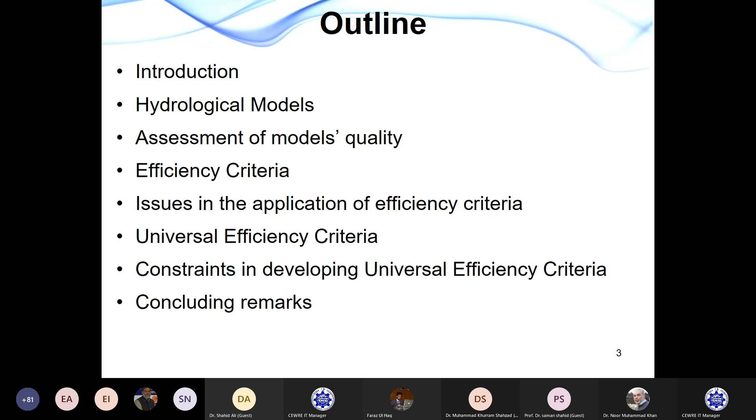The hydrologists and water resource engineers are technically interested in providing information to the decision makers, and in that case, they have to select the appropriate model. The selection of this model could only be done by some efficiency criteria. But in the scientific community, the main issue is that there isn't any single universal efficiency criterion that could give us information about the selection of the appropriate model. In selecting the wrong efficiency criteria, we end up calling a good model a bad one and vice versa. Therefore, I have selected a few slides to share my thoughts on the importance of efficiency criteria.

So maybe we can move to the previous slide. Okay, thank you.

The hydrologists and water resource engineers are looking at trajectories across space and in time. With models, they do a complex abstraction of a system or part thereof, which enables us to look through the spatial and temporal domain in advance. By doing this, we can reproduce the historical and future behavior of natural phenomena.

So whether it is a mathematical model or a physical model or a logical representation of a system, the aim of modeling in water resources is to get information about the parameters of interest, such as precipitation, discharges, water level, storages, before their real occurrence at a certain point in time and space. Or with the help of this model, we can enhance our understanding of the real world, or anticipate the behavior of the prototype in advance, especially in physical modeling in hydraulic engineering.

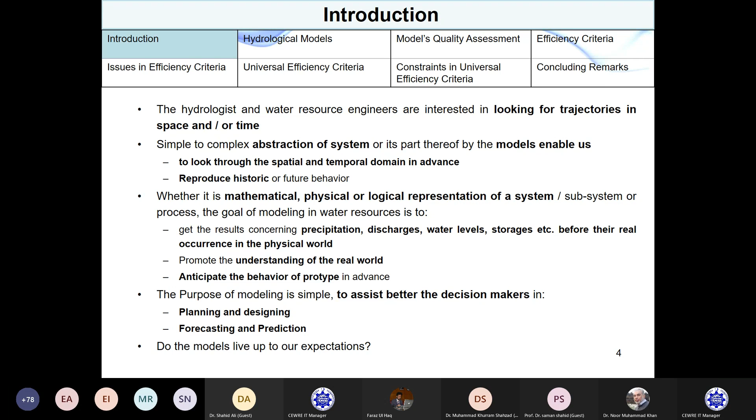So in a nutshell, the purpose of modeling is simple. It is to assist the decision makers in planning and designing, forecasting, and predictions. The question is, do the plethora of models that we use every day live up to our expectations? How can we differentiate good models from bad ones? What makes a certain model a good choice and vice versa? Is the physical representativeness of the model more important than its functional accuracy, or is it justified to attach the same expectations to different sorts of models, that is metric, conceptual, semi-distributed and distributed models?

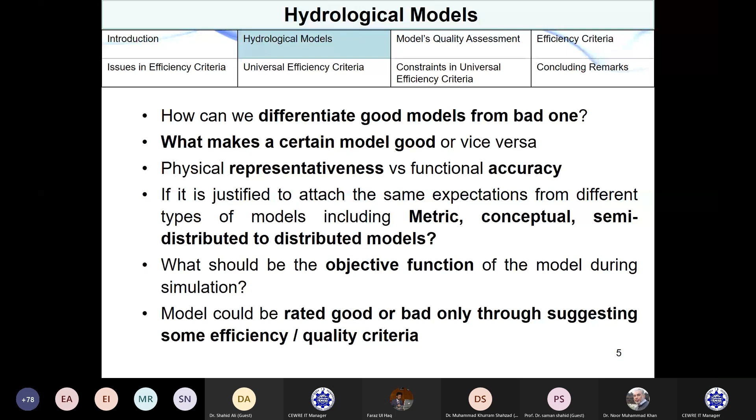So there are a lot of questions. Today I am restricting myself to a very vital question, that is how to define a model. What could be the objective function that makes the model a good choice or vice versa? As we all know, a model could be rated good or bad by scores. It could be the score of a certain efficiency criterion, whether it's Nash-Sutcliffe, coefficient of determination, persistence index, or any other quality criterion that you decide beforehand to use for assessing the quality of the model.

Now, the performance of the model could be gauged through two different manners. One is subjective efficiency criteria and another is the objective efficiency criteria. In the subjective efficiency criteria, what we do, we plot a graph between the observed and simulated values, and then we see how good our model simulated results are fitting with the observed result, and that determines how well our model is behaving.

And on the other hand, in the objective criteria, what we do, we take some kind of objective measures that take the subjectiveness out of the decision making process. Rather, we rely on certain scores. The first indication on the performance of the model is actually the difference between the observed and the simulated values, whether it is precipitation or it is...

Sorry, I'm not seeing my presentation anymore. Hello? Kindly share the slides. Dr. Khurram, yes. We are resharing the slides. Please wait a moment. Yeah, okay.

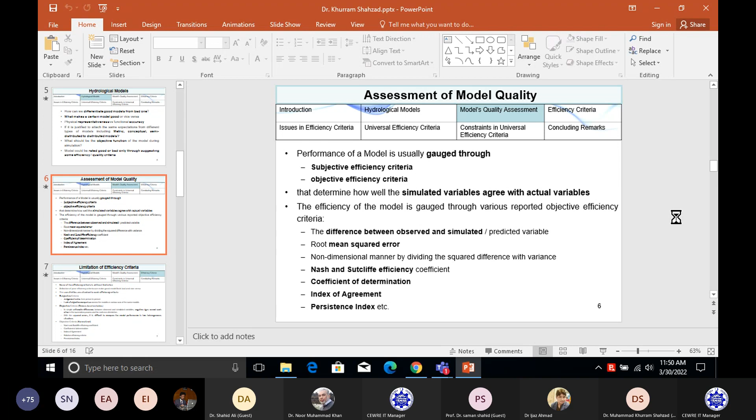Now, as I was saying, the difference between the observed and simulated or predicted variables is the first indication of how good our model is performing. Either we can take the simple difference or we can take the square difference and its root, but that gives us the initial idea about the performance of the models.

And then we have some kind of non-dimensional measures of gauging the performance. In that case, we can use the Nash and Sutcliffe efficiency criteria, persistence index, coefficient of determination, and these criteria have some added benefit over taking the simple difference between the observed and simulated variables. Please move to the next slide, slide 7.

Okay, the point is how we are going to select the efficiency criteria, as none of the efficiency criteria is without limitation, and the selection of poor efficiency criteria makes a good model look bad and vice versa. There are certain sensitivities attached to each efficiency criteria.

For example, if we are taking the subjective criteria in deciding about the goodness of the model, then the judgment about its acceptability varies from one person to another. And secondly, we lack the comparison between one model and another model or two different runs of the same model, because the subjectiveness varies from one person to another.

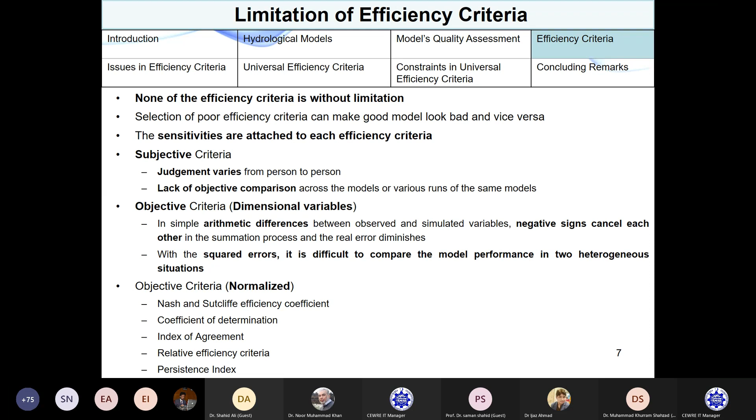Therefore, the scientific community has moved toward normalized objective criteria that include the Nash and Sutcliffe coefficient, coefficient of determination, persistence index, relative efficiency criteria, and certain other efficiency criteria. Next slide, please. But none of these efficiency criteria are without certain limitations and sensitivities attached in certain regions.

I have given you on this slide a depiction of the Nash and Sutcliffe efficiency coefficient. On the top of this slide, I have shown you the equation of what Nash-Sutcliffe does. It takes the difference between the observed and the simulated values and takes the square, and then we sum it and divide it by the difference between the simulated values and the mean, and we subtract it from 1. And then in the range of 0 to 1, we say whether our model is good or bad.

But the problem is, the Nash-Sutcliffe efficiency coefficient could tell you that the model is performing very well, but in actuality, the model is not performing well. I can show you on this graph. If you can see the green curve and the blue curve, these are the two curves showing the observed discharge and the simulated discharge. And the arrow is showing the difference.

The small arrow between the blue and green curve is showing the difference between observed and simulated values. And the larger difference between the simulated curve and the mean of simulated discharges is going to show you what we are going to insert in the denominator.

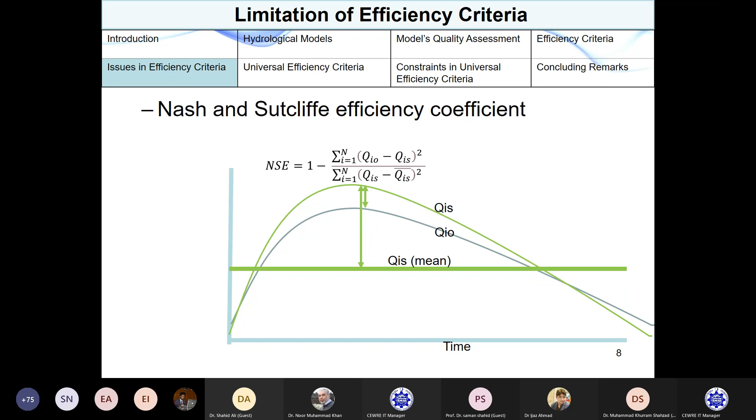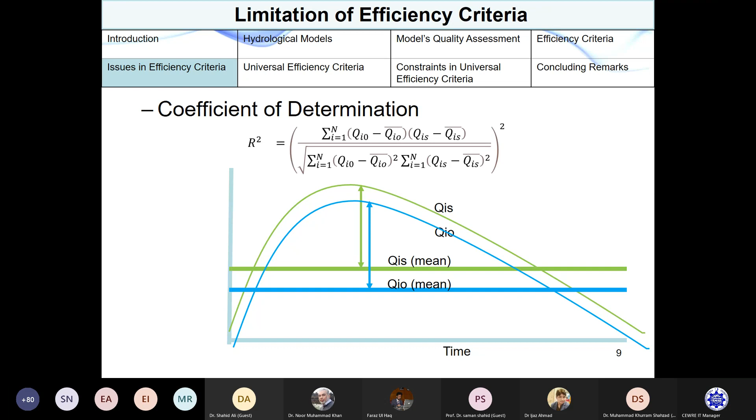The second issue which I want to share with you at this point is that in the selection of efficiency criteria, we need to be very careful about the movement from the known data values. Normally we normalize our difference with the variance. And what is the variance? Variance is the difference of observed values from their mean value. Now, it is a good thing when you're simulating the model for many years and you don't have any information for a year, 2 years, 3 years, 4 years.

Then the best guess you have about the data is the mean value: mean discharges, mean yearly discharges, mean precipitation, and so on. But in the case of flood forecasting, for example, or real-time rainfall forecasting, the best guess we have about the hydrological event is not the yearly mean, but rather the previous data, 1 day before, 2 days before.

Therefore, we need to check the performance of our model not by taking the difference of the observed value from its mean yearly value, but rather by taking the difference between the observed value and the available guess to us, that is the previous day discharge, previous day precipitation, and so on.

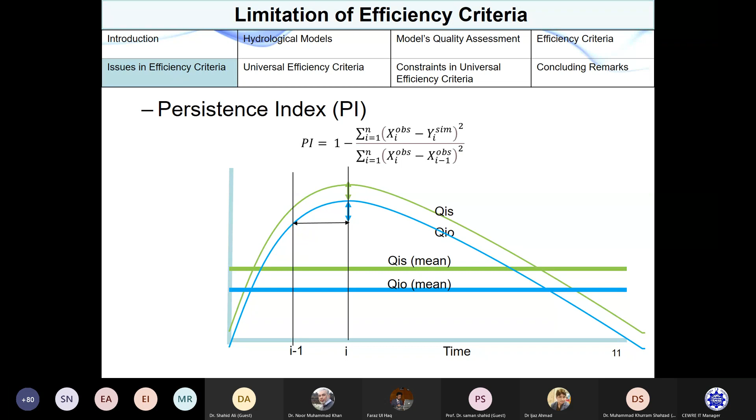However, this efficiency criterion is not without certain demerits, because it is going to punish the model if the difference between observed and simulated values is very small because we are lying in the low discharge zones, and if the differences between the current day and the previous day discharges are even smaller, then we are going to get a bad result even though our model is performing very well. However, in the peak discharges, the persistence index is going to give you a good indication about the performance of the model, but in the case of low discharges, it's going to punish you.

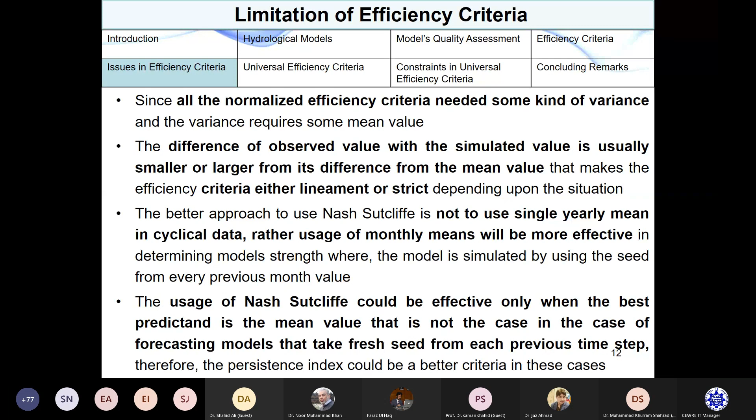So it is an interesting idea at this point in time to have some kind of universal efficiency criterion that could perform well across different hydrological models. It could be used for various purposes, planning, forecasting, and prediction, with variable inputs in the simulation phase, whether it is a yearly input, a monthly mean value, or past daily data available to us.

So the choice of the hydrologist or water resources engineer is to have some kind of universal efficiency criterion that could give us a score between 0 and 1, with the help of which we can declare the model good or bad, as most researchers normally do. But it is very difficult, if not impossible, for any single efficiency criterion to satisfy the conflicting demands of each model. So what researchers do in that situation is use multiple efficiency criteria to rate the model, taking their average in some cases.

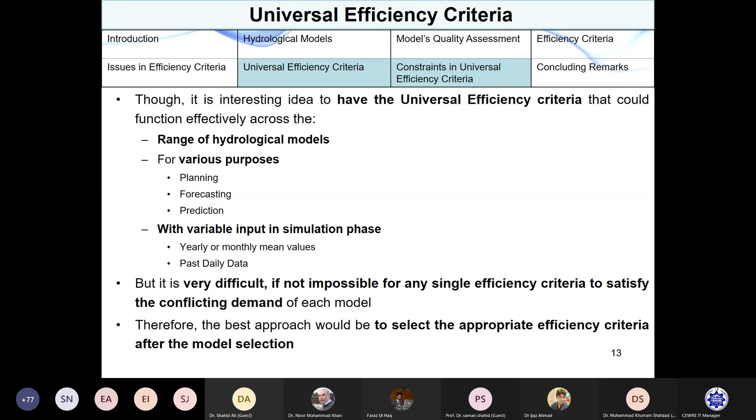But that is again the wrong approach, because multiple efficiency criteria is going to confuse the reader, because the efficiency criteria should be carefully chosen according to the situation of the model, and only the right efficiency criteria can give you the unbiased opinion about the acceptability of the model, what you are using. Therefore, the best way is to select the one, two, or three appropriate efficiency criteria that are unbiased in the situation, by looking at the trend of the curves of the data and the equation of the efficiency criteria, and then selecting one and rating your model.

Now, I'm moving toward the end of my presentation. The following points, what I personally think should be kept in mind while selecting the appropriate efficiency criteria: you need to ask certain questions, whether the interest is in showing the physical representativeness of the catchment or its functional accuracy, because these two purposes are going to lead you to different sorts of efficiency criteria. And the next thing you need to ask yourself is, what is the best predictand available to us in the absence of any model?

For example, if we want to forecast what is going to be the rainfall or discharge tomorrow, the best guess available to us is today's discharge, not the mean discharge of year 2022. Therefore, you need to rate the performance of your model against the best available predictand at that moment of time and space.

And the next thing is, you need to check if the data is cyclic with variation in the mean across the time series. For example, you can have one mean value of discharges from 365 days, a yearly mean, or you can have different means in different seasons. Maybe you have 4 different means in 4 seasons, or 12 means in 12 months, and then you can have different efficiency criteria for each month, because using the Nash Sutcliffe with 12 means on the denominator side is going to give you a more realistic picture in cyclic data.